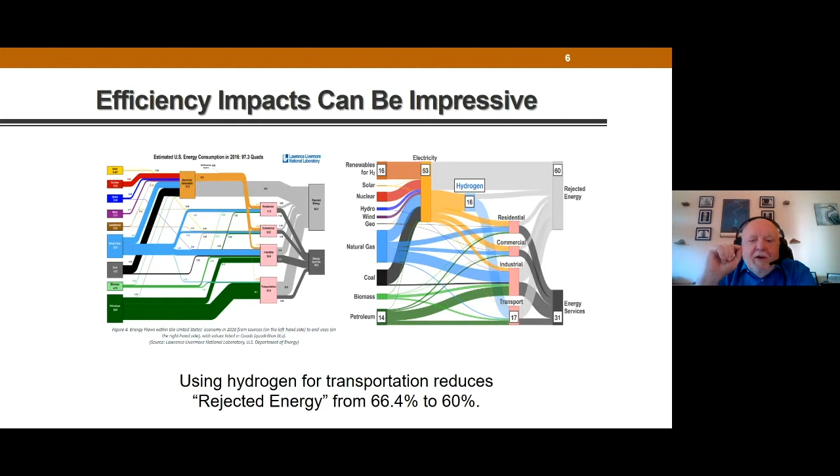But the interest in hydrogen is broader than that, because if you take all your fossil fuels, your natural gas, green natural gas, emissions from landfills, and biomass, and use a steam methane reformation process, you can convert that to hydrogen. That does produce CO2, so you can either take the CO2 and sell it where it's needed, or, if you're in a place like Texas with good sequestration sites, you can sequester the CO2 - taking it out of the fuel and turning the hydrogen into fuel. The other option is electrolysis of water using renewable energy - wind, solar, hydropower - to make hydrogen directly. The third option is using nuclear power to make hydrogen directly through high-temperature electrolysis of water.

And the hydrogen, what do you do with it? You use it in industrial processes. In fact, the main use, the primary use in the United States today is in the petrochemical industry. That's why Texas has a hydrogen industry, because we're making hydrogen and using it in industry for processes.

The second thing you can do is for power generation. You can help improve the performance of the grid and potentially provide storage and provide reliability, provide backup. You can reduce the cost of heating, and you can generate improved transportation. And the transportation is particularly interesting because it gives one of the things that people have been looking for a long time.

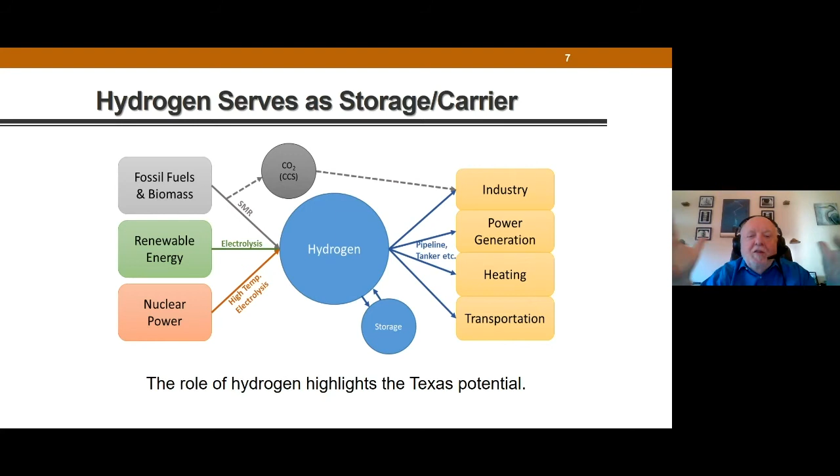A problem with cars and trucks is that they emit their CO2 everywhere. And if you run them on hydrogen, if you still use the fossil fuel, you can remove the CO2 at a given point and let them drive over the country, producing nothing but potable water as an output. So the role of hydrogen actually highlights why Texas is so interesting to Texans and to the world as a hydrogen hub. Can I have the next slide, please?

And the reason for that is, as Varun mentioned, we have the NREL chart, that we have one of the largest, if not the largest, pipeline infrastructure in the country. We are the leading domestic producer of hydrogen, okay, so we have some infrastructure, but the important part of this is that we have an experienced workforce. We have people who know how to make, transmit, and use hydrogen.

So we don't have to start from scratch. We don't have to educate from scratch. We have an experienced workforce. We have a large presence of companies who are leading in the hydrogen space. And what does that mean? That means we have corporate leadership that understands the hydrogen markets, understands the pros and cons. So we have the management structure that we need in the state. So we have the workers and we have management that already understand hydrogen.

Now, we're talking about using renewable energy. We have an abundance of renewable energy in Texas. As the representative pointed out, we have huge amounts of solar and wind power in West Texas, and have already built the power lines to move them to the eastern side of the state. We also have natural gas. We have nuclear power. So we have the ability to generate the hydrogen, to move the hydrogen, and to manage the entire process. We also have the potential for large-scale storage of the hydrogen underground, given the geology of the state.

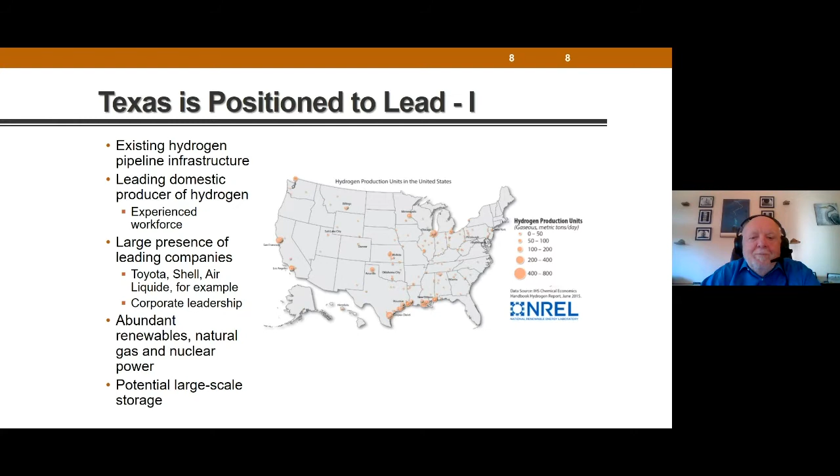And universities are important in this for 2 reasons. One, we could do the R&D needed to drive down the cost of technology. And the second one is that's the only place you get the next generation of leaders. The universities are right now educating the people who are really going to be the ones who develop the hydrogen economy. Next, please.

Next slide, please. And we've talked about needing research and development and needing economy of scale. I also want to pause for a moment because the economy of scale for high tech is a nuanced situation. It's not like, okay, I know how to build one, let me build 1 million and they'll be cheaper. The best model, the most obvious model, the most popular model, the most widely recognized model is Moore's Law.

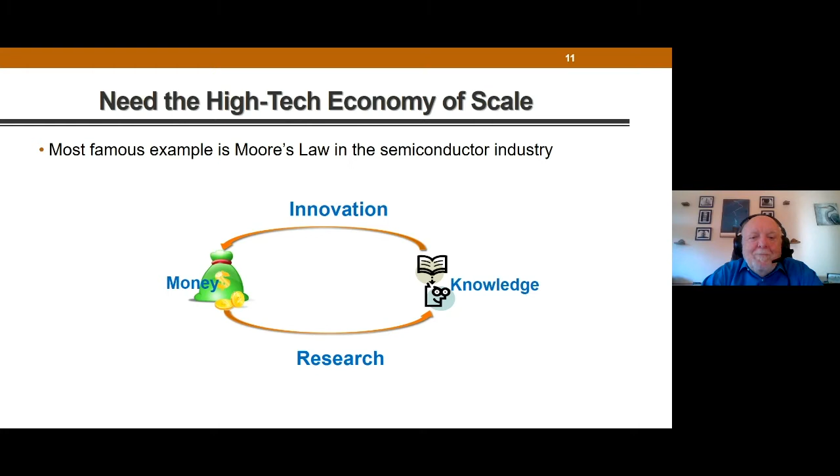Right now, I'm not a technology prognosticator, so I'm just reflecting the world right here. But right now, it looks like the most promising killer app to make the next step in hydrogen is in trucks. China has already made a huge financial investment in trucks. We have some of the major corporations putting in hydrogen trucks and drives. We have UPS and FedEx with hydrogen delivery vans on the road. I'm happy to say that one of the first was actually designed and built at UT by undergraduate students and is now driving on the roads in California.

The reason trucks look interesting is because the fuel cell and battery drivetrain are smaller and lighter than a battery alone. So if you're going to go electric, fuel cell and drivetrain suddenly look very good if what you're trying to do is carry as much of a load as you can. We need to make our powertrain as small as possible.

In addition, you get greater range than on battery alone, so that you can drive it as far as you used to drive your diesel truck, and you have shorter refueling times. You can refuel in times like you did the conventional diesel truck - you don't have to worry about how long this is going to take to recharge the battery. So if we combine batteries and fuel cells on a truck, it looks like there's some real advantages.

The other advantage when we look for economy of scale is that compared to a lot of the other applications, trucks are cheap. There are millions of trucks in the world, and we make lots of them. We can sell lots of them so that we can make them fairly quickly. They can be sold, and that will drive down the supporting technology cost and provide that financial virtuous circle that will allow us to generate more funds to provide more and more applications - to trucks, to cars, to industry, to power, to aircraft, who knows where it's going to go. But we need these apps to come along one at a time.

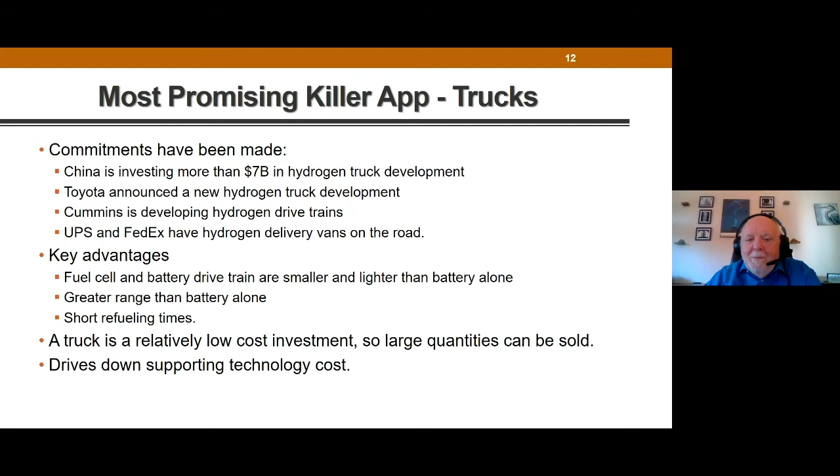The basic takeaway is you can tell I'm excited about hydrogen. I'm putting a lot of my time into it, but I do continue to remind people that right now cost limits hydrogen growth today. Everything we're talking about doing, we need to get the cost down. But the reason we're excited is because there's this huge upside potential that we can do the things we're doing better, faster, and cheaper if we figure out how.

Texas has the economic and academic base to be a world leader in hydrogen. Very few places in the world have experienced people, experienced companies, the natural resources, the storage, and a core group of researchers. So we have a major advantage. With effective leadership, the hydrogen economy can be a huge economic benefit for Texas, and in that way, be a benefit for the U.S. and the world. Thank you very much.

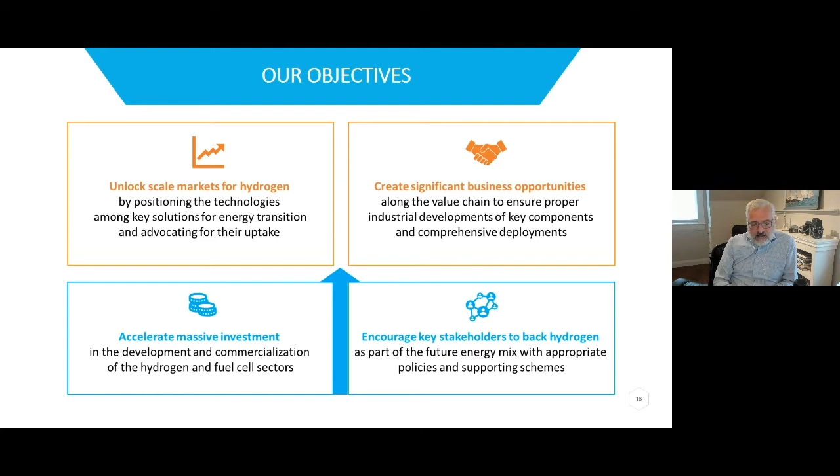What we've been doing is trying very hard to keep our feet on the ground. Hydrogen is a sector that in the past, going back into the 1990s, was surrounded with a lot of hype and talk—those were the days of coming out of the lab into actually delivering applications. But today we have tremendous momentum, strongly supported by the Hydrogen Council delivering detailed industry data, particularly addressing the point Robert was raising around cost. What we've been doing is consolidating inputs from our industrial members and sharing publicly what we see as a future cost-down curve.

I'm going to talk extensively this morning about that. In a report on our website published in January of last year, we project that by 2030, less than 10 years from now, the cost of hydrogen technology will fall sharply, enabling 22 applications—I'll identify these in a moment—equivalent to 15% of global energy demand becoming competitive in hydrogen. That's not far away. Further, by 2050, we envision 6 gigatons of CO2 can be abated, 30 million jobs provided, and a $2.5 trillion market in hydrogen opened up.

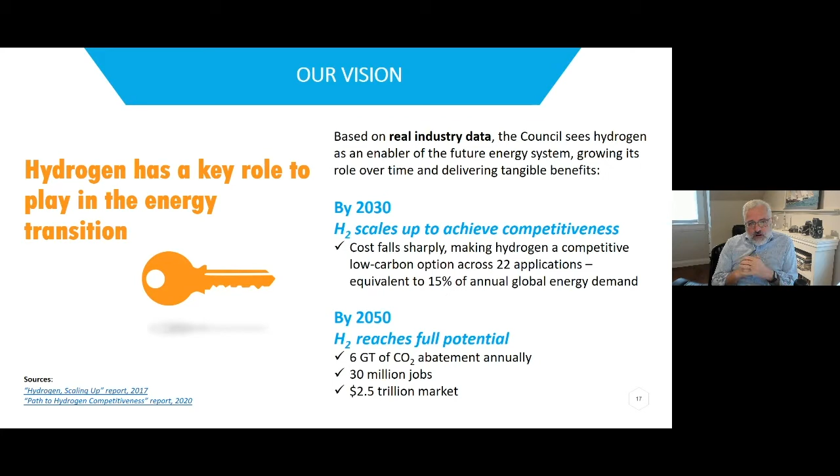We've identified 4 priorities, and the one I want to start with is safety. In the public mind, often when you mention hydrogen, safety comes first as a concern. The Council has made safety a priority. There's a long history in industry of delivering and operating hydrogen solutions safely, especially in Texas. You don't often hear about accidents or issues around hydrogen use in society, and we want to keep it that way. As these applications scale into new public spaces—buses, trucks, trains, and many other new uses for hydrogen as an energy vector—we want to ensure all standards, regulations and practices are in place so we can deploy hydrogen in society more pervasively, but absolutely safely.

That brings us to the next important priority: being the global voice for the industry in hydrogen. There are a lot of misunderstandings about hydrogen—what it can and can't do, and what its place is in society.

One of our tasks, and even what we're doing today, is to share the hydrogen story, help people understand it, make it more accessible, and show how hydrogen fits into the future of our energy needs. We believe all of this will generate a marketplace for business to transact business, and to do that in the container of a regulatory and standards framework where there's a level and fair playing field, and there's some coherence about the incentives and stipulations that go around this new hydrogen economy. So those are our priorities in the Hydrogen Council.

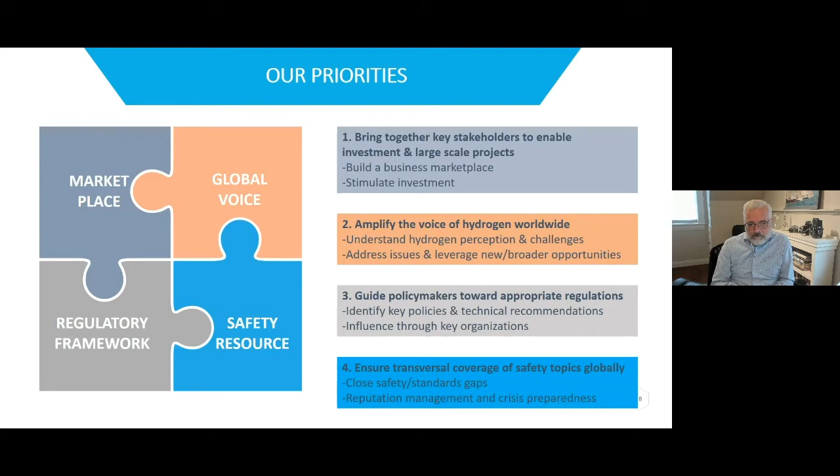On the website, you're going to find reports, and I'll go back again to the process of our report making. There are a number of Hydrogen Council members that are going to speak later in this session, and they, along with almost 100 other companies, have come together in a process where they share their forward-looking cost data and projections for various hydrogen technology applications. We process that data through what we call a clean room, so there's no anti-competitive behavior here. All of the information is coming into one confidential place. There's no sharing of that information between companies.

Within our clean room, we consolidate that data and then we publish the aggregated, consolidated information from all of the industrial input. So it's a very high integrity process, which I think offers the best insight in the world into what exactly is going on with this main historical impediment around cost. You can find some of our historical publications on the website now. We're just going into our annual major CEO meeting next week, and there'll be more publications coming in the coming months. So please make sure to return to the website in the coming weeks and months, and you're going to find more current and up-to-date information there.

This is one of the most useful slides in our January 2020 report, and it will get updated, I think, again in February. Like any 2x2 matrix, the happy place is in the top right-hand corner. In that corner you have those hydrogen applications which are most competitive against conventional alternatives, and also, using the y-axis, those hydrogen applications which are most competitive against alternative low-carbon solutions like batteries, etc.

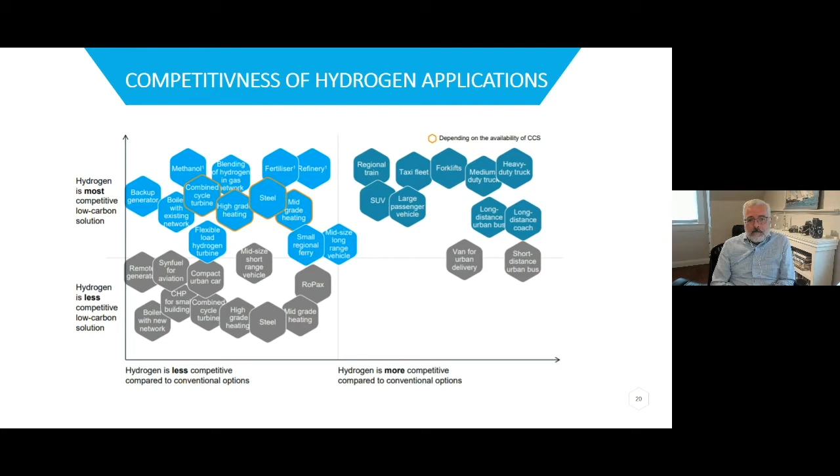So we're at the beginning of a journey, but the good news is that the learning curves we've seen for cost reduction on solar and wind are also going to be replicated as the hydrogen industry scales. This means that while cost has historically been an impediment, as we start to scale the industry - and that's indeed happening now - and step through those relatively early phases from hundreds to thousands to tens of thousands to hundreds of thousands, we see very dramatic cost reduction, meaning 40, 50, 60% cost reduction, and very significant learning curves over the next ten-year period. Again, a reminder that all of this information came from the industrial members of the council, confidential cost information processed into a clean room. So I think this is perhaps the highest integrity source and insight into hydrogen technology costs available anywhere in the world.

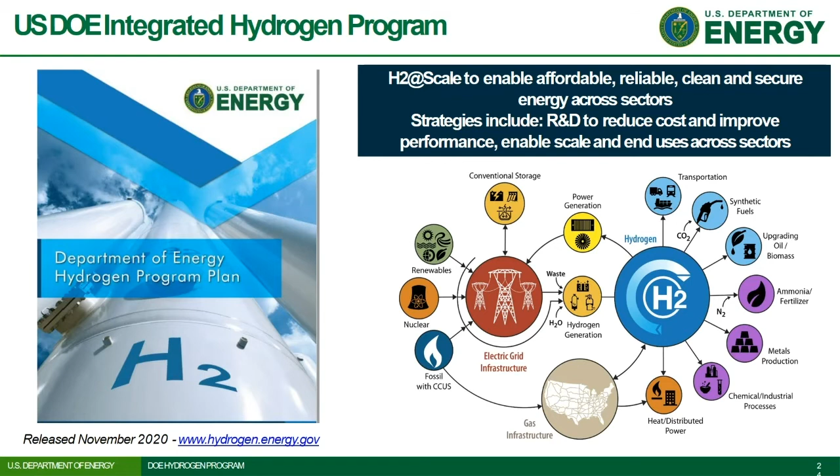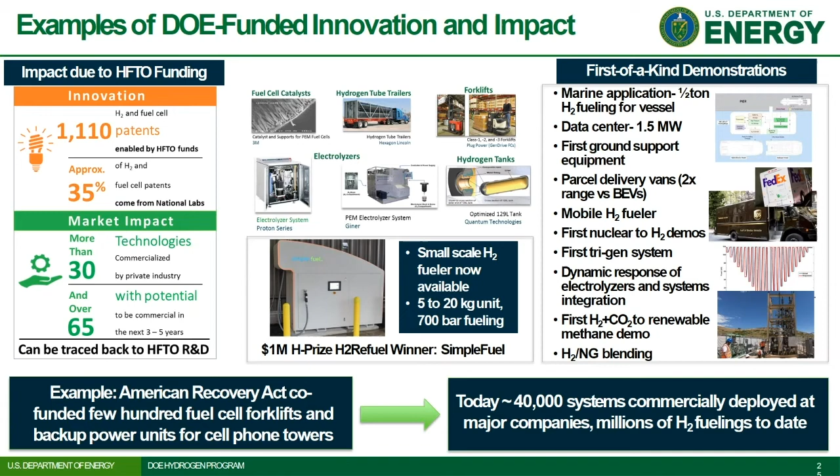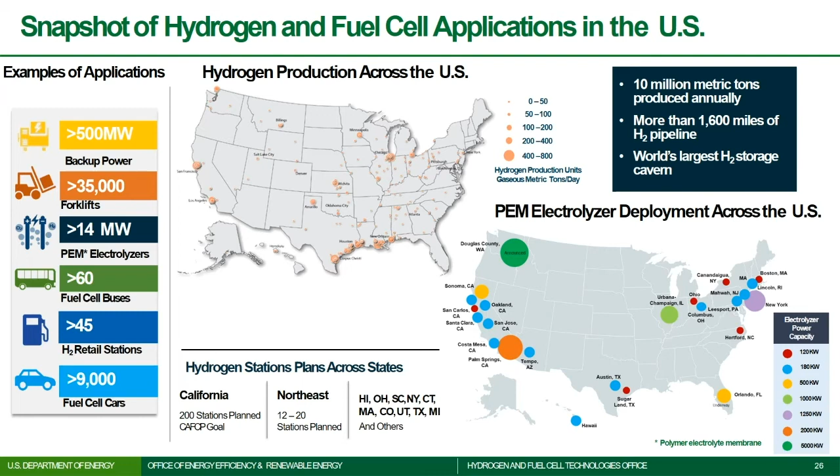So the map shows you at the top, again, SMR, very predominant. Texas, as was mentioned, also has the world's largest geological storage cavern, also the hydrogen plus CO2 capture. And then on the bottom right, you can see the map that we just unveiled showing PEM electrolysis deployments. So we're at about 14 megawatts now. And here too, Texas has some examples, mostly for the semiconductor industry. Again, this is just one snapshot in time. It's moving very quickly.

And so if you go to the next slide, the next question that we always get is, what's the cost of hydrogen? So I think we all know that the cost of hydrogen from SMR is really cheap today in the US, less than $2, $1 to $2. And there are a number of studies, again, big congratulations to the Hydrogen Council for all the well-vetted analysis. I think everyone agrees that there's just so much hype on hydrogen and numbers.

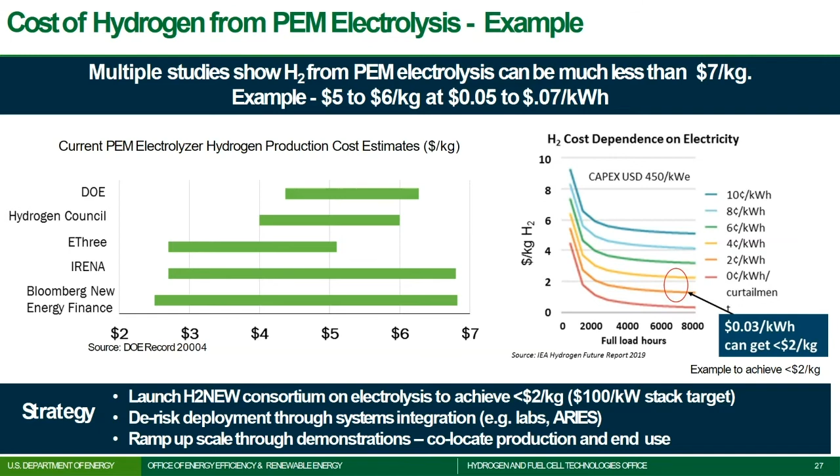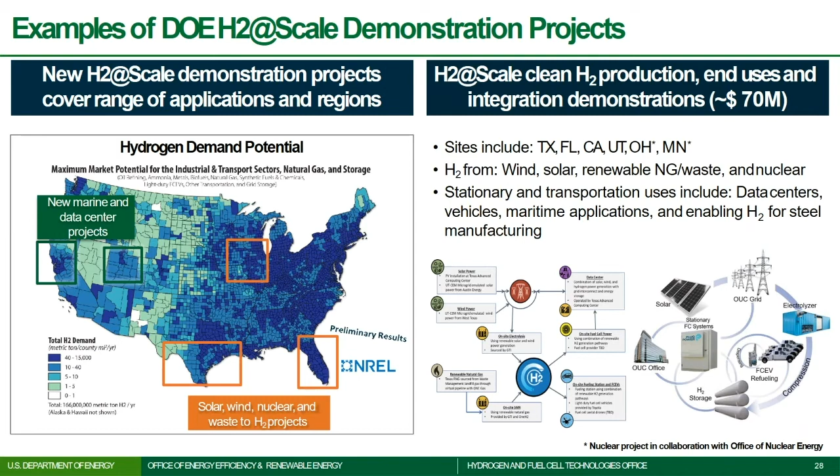On what are potential opportunities, we have resource analysis, a report that was published, and this one shows potential demand analysis for different applications. So having strategic analysis that can quantify opportunities and show the business case is really critical going forward. It's not just about one-off demonstrations here and there; we have to think very holistically about resource availability, water availability, where it makes sense, and how we can get to scale.

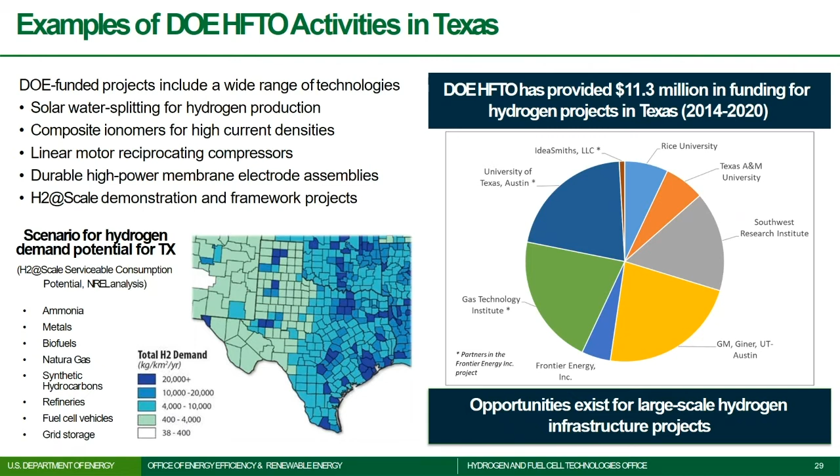I think the last thing is really, it's so important to collaborate now. There's just so much excitement on hydrogen, but now is really the tipping point, and we want to make sure that we all are rowing in the same boat in the same direction. So thanks again for the leadership to all. I'll turn it over back to you.